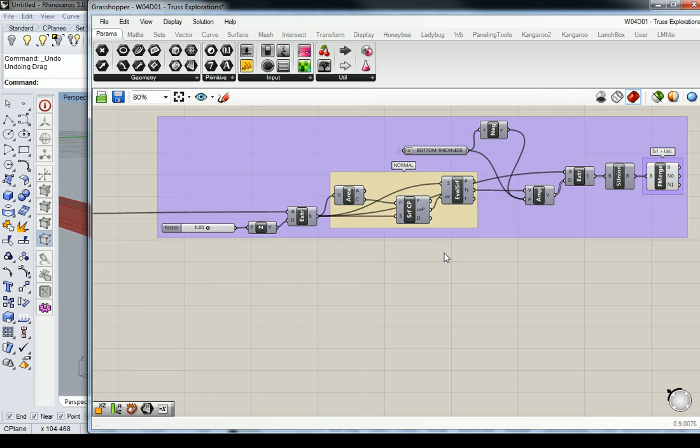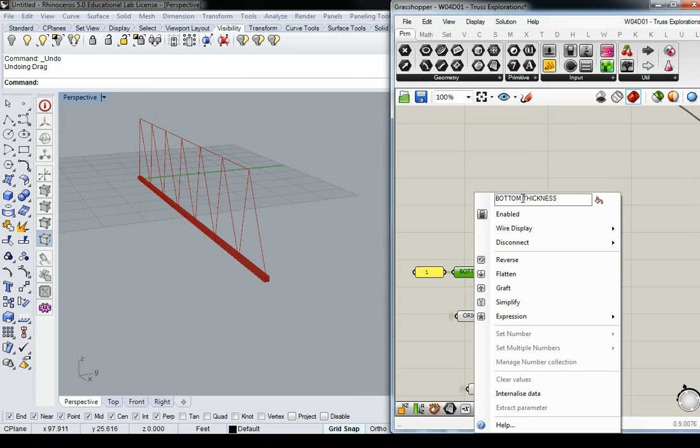Let's continue on with the top chord. So the top chord is pretty much going to be the same story. In fact, I think it's just about going to be exactly the same thing. So I'm going to just copy this, paste it, put it down here. And I actually will copy this in case I want to change the top chord thickness to be different than the bottom. So I'll change this to top.

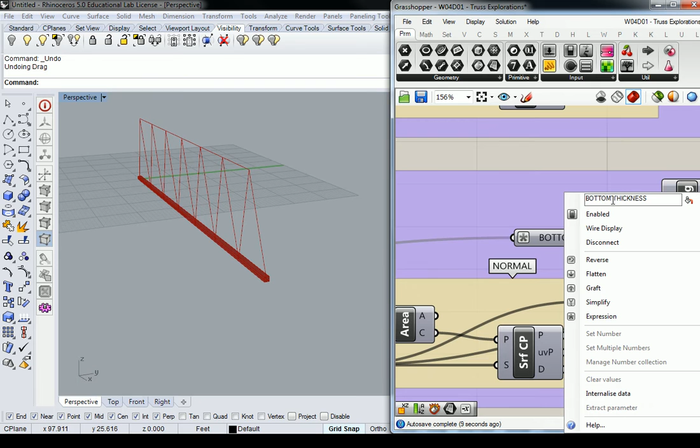And then make sure that you replace the connections. So you won't see this one, that this one is actually connected down here to the bottom chord thickness over here. So you have to override that one manually. So now this one is connected, and make sure that you rename this one as well, just to be clear, so you don't confuse yourself. You have to rename it in both positions. So change this to top.

And then you also have your bottom curve plugged in down here still. So you should be able to just replace your top curve, and that'll recalculate the whole thing on the top. Once again, simple enough, right?

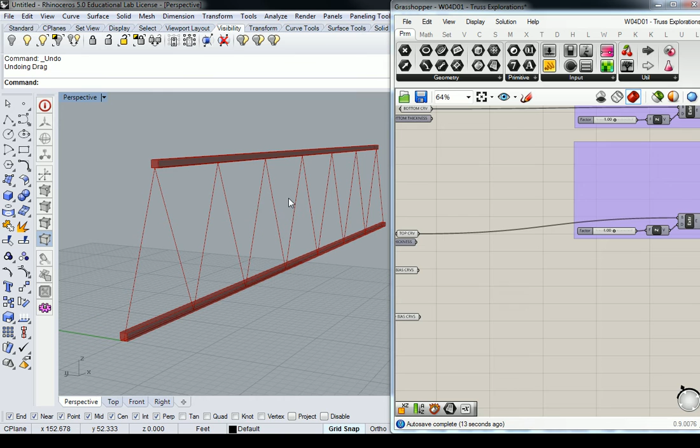Yay! I know, it's super exciting.

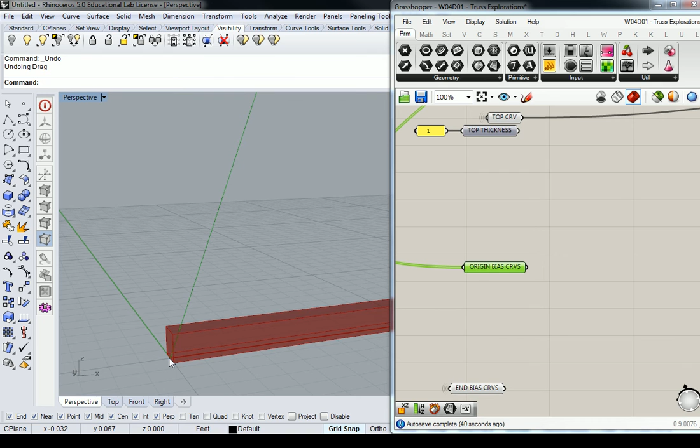So then here, now as you guys are getting caught up with me on that one, I'm going to begin to explain what happens with the other ones. So the other ones are a little bit different. If you notice here, the origin bias curve goes all the way to the end here at the base, and then it goes again all the way up here to the top at the bottom of that top chord.

Sorry. Something to be aware of is that this extrusion actually went in the positive direction, not the negative direction. Okay, so that's why it's converging to a point on the bottom of the top rail or top chord. So if it matters to you, you're going to want to flip that down to the bottom side, if the outer profile of this is like your absolute maximum. Anyway, I just want you to be aware that that happens.

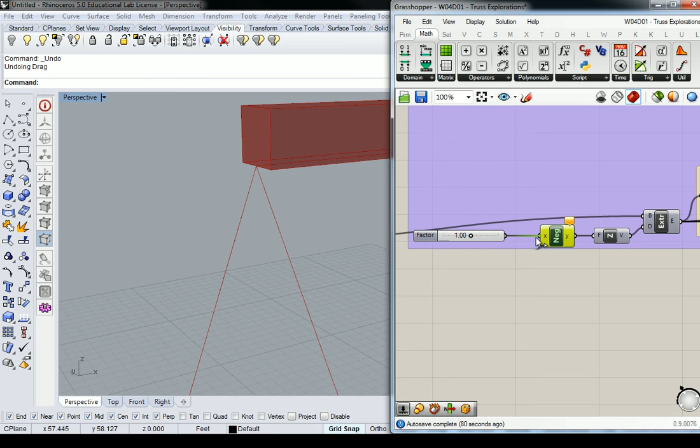So just for argument's sake, I'm going to flip that back to a negative so that it goes down instead. There you go. And so that's going to look like that now. And at this stage, I'm kind of looking at this, and I need to think about how I want the extrusion to look for this particular item.

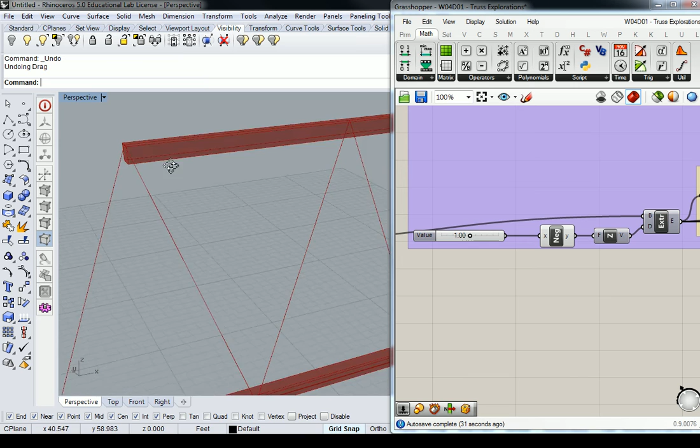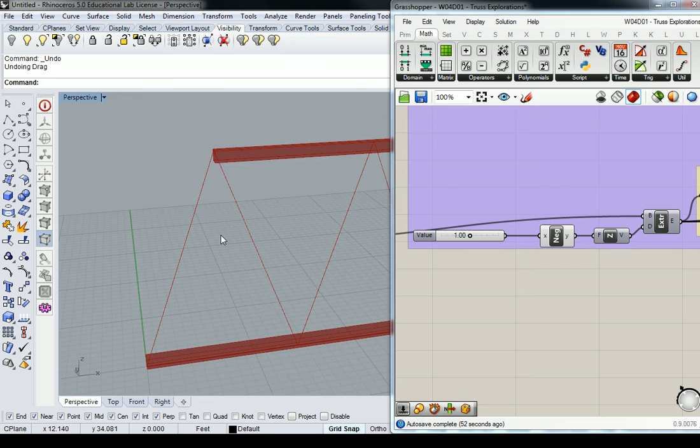You have a few options. It kind of depends on how you want to detail it. I have the ability to extrude the face of this a little bit further out if I need to. I could also go through the process of actually trimming this curve. I could decide whether or not I want the internal curves to extrude both directions, but if I want my end curve to only extrude down, that's a possibility, but there will be some asymmetry associated with that.

So for this case, let me check what scale options I have actually. Scale and non-uniform. It's going to give me the base plane X, Y, Z. Yeah, scale, that's what I wanted. Okay, so in this case, I think what I'm going to do is, in Rhino at least, it's called scale one direction. And it just scales it along one axis. So for those of you who don't know, it basically means it's a stretch tool.

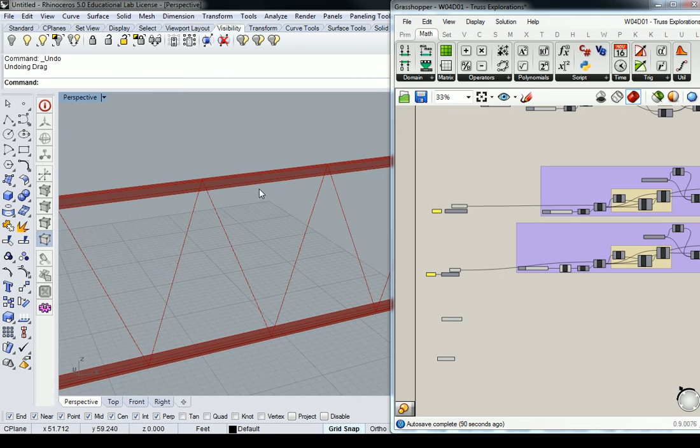So if I have a circle and I scale it in the x-axis, it becomes an ellipse, right? Because I've stretched it out in one direction. So we can do that using the Scale NU tool. So it's under Transform, Affine, Scale NU. And so this is a scale with non-uniform factors.

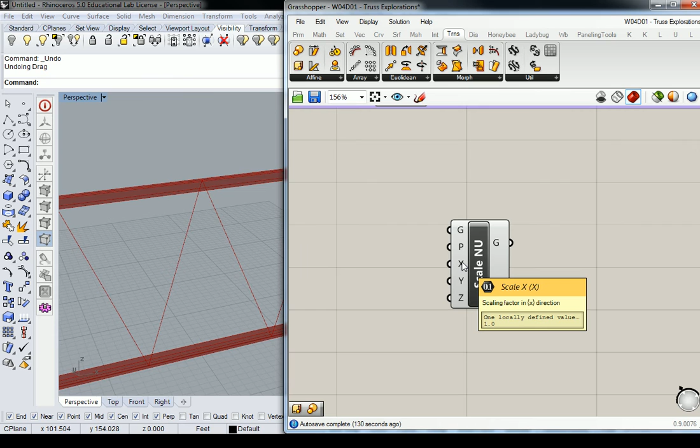So that means if the y and the z remain at a scale factor of 1, and we change the x to be a scale factor of 2, then we've essentially stretched it in the x direction to be twice as wide. Does that make sense, theoretically? So let's apply it. Yeah, this is for the top chord. All right, so this is the item that we're going to extrude. Scale one direction. So we can plug that geometry in here.

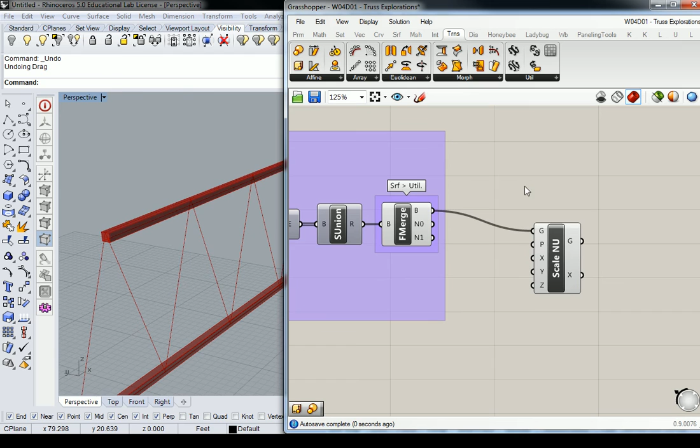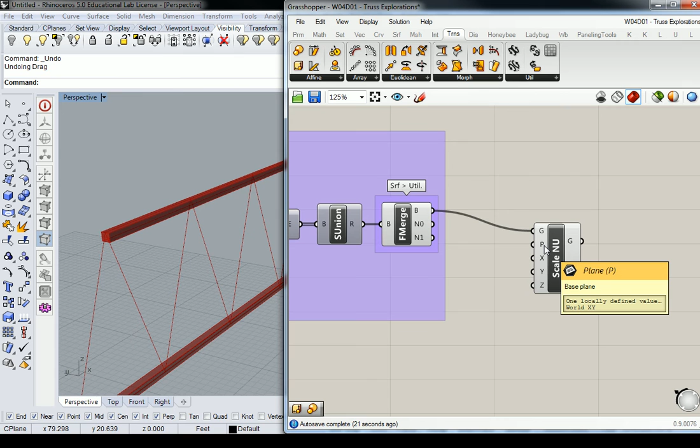The base plane is kind of key. So the base plane is going to be something that we define to be the new x and y and z relating to the orientation of this particular item. So if I don't change the base plane and I use the world XY, that means that it's always going to stretch in this direction.

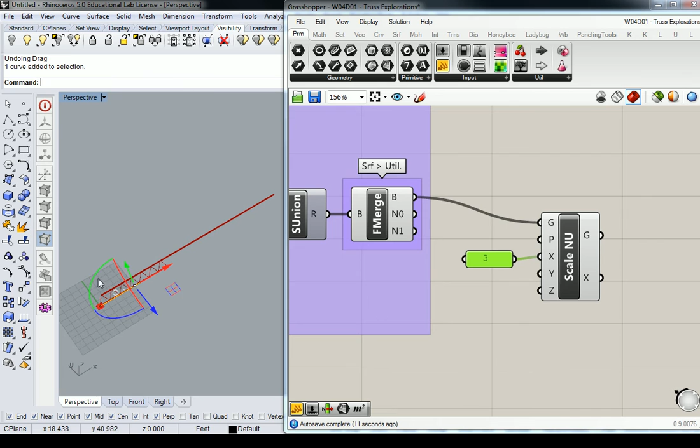So for instance, let me drop a param in here that scales it a value of 3, just for argument's sake so you can see what happens. So if I scale this 3 times in the x direction, it goes that way. And then if I change the orientation, then no longer am I in line, right? So we need to make sure that we reorient the plane to be associated with that particular edge.

Also, the scale factor, you'll notice here when it's a world value of 3, it moves the geometry to this point right here. Or not this point, but I should say this position. So why do you think that is? Cuts it into thirds. What's that? It cuts it into thirds. No. Good thought, but no. It's actually really confusing because it looks like it's exactly on that point. So I can see why you would draw that association.

But the fact of the matter is, in the x direction, the position of the existing geometry is not on the x value of 0. So when it scales by a factor of 3, it takes the distance in the x direction that this thing starts, and it multiplies that by 3. So it starts it in a new position. So that means that the plane that it's scaling by is positional as well. It's not just orientation and direction, it has a position. So the plane is also the center point of scaling.

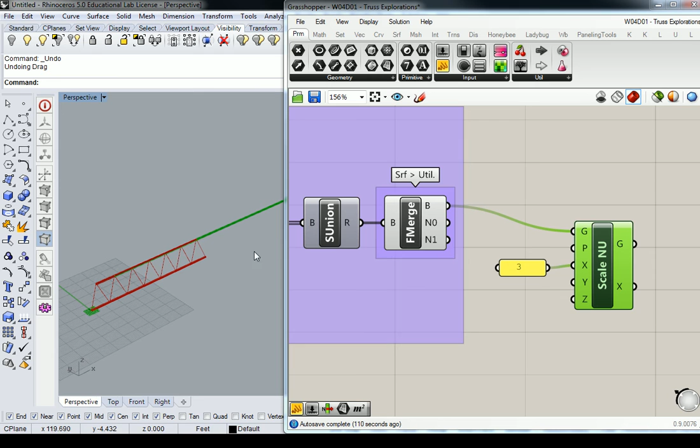Is that clear? So what we're going to do is find the midpoint of that geometry, or whatever point we want to scale it by. Or the midpoint of the line even would probably be best. And then we're going to scale it by that. So let me show you 2 ways of doing this. The midpoint of the geometry, which is the easy one. We just find the centroid.

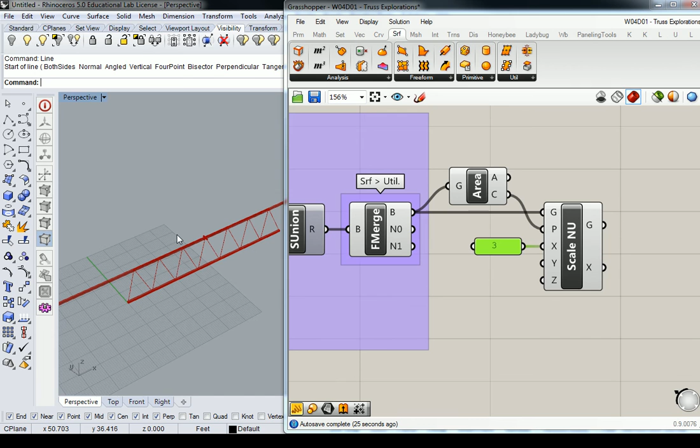So let's go to Surface, Analysis, Area. And I plug this in. And then I plug the centroid into the P value. So now you can see that it's extruding this geometry on both sides. Right, so that corrected it, sort of, kind of. However, if you... Oh, wait. It's only one direction, so it won't do... Okay, never mind. We can just use the centroid in this case. I was going to overcomplicate it. So anyway, in this particular position, we found the centroid. We basically replaced that as the plane.

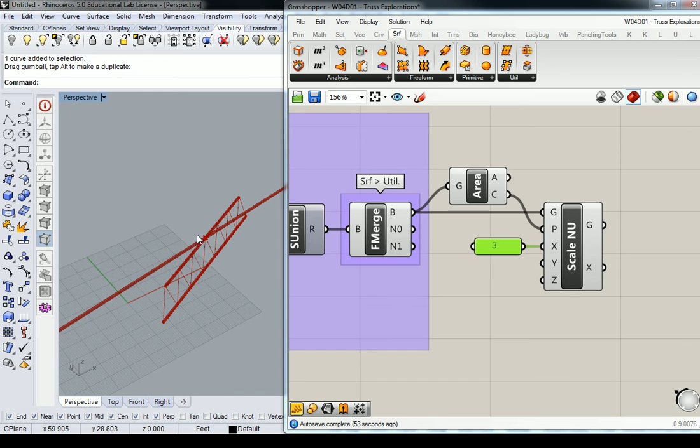However, the centroid is not going to work for us here because, again, if I take this geometry and I move it, it's still an XYZ based point because all we did was give it a point, and the point borrows its orientation from the world XY in this case. So going back again, the actual way that we want to do this is to find our center plane / point by using a perpendicular frame. That's the best way that we can do this. It's found under Curve, Analysis, Perp Frame.

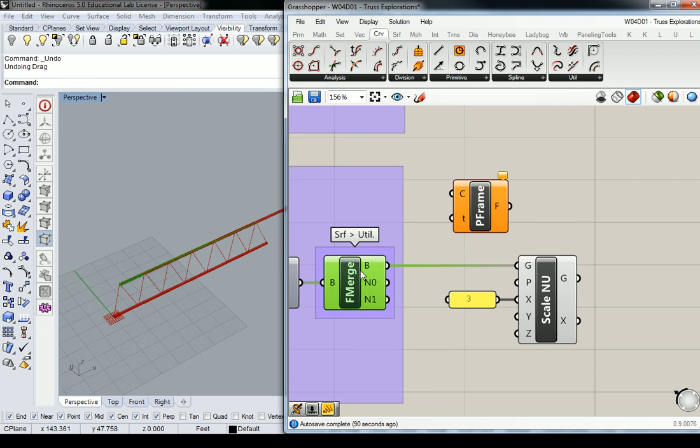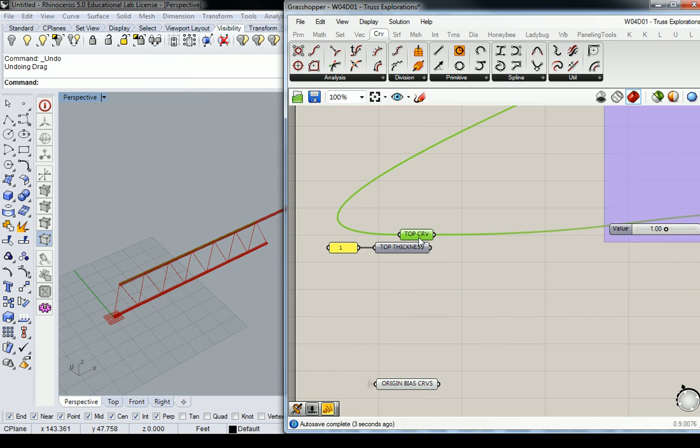So the perp frame is evaluating a curve at a particular parameter. And so this is a domain. It says parameter on curve domain to evaluate. So let's take a look at what that means. I have to go back to the curve itself first. So I'm going to find the, where was it? There it is. Not top thickness. Top curve. And actually, I'm going to clean this up a little bit. So I'm going to do another wireless TOP CRV. And I'll put this back over here. So the top curve gets plugged in.

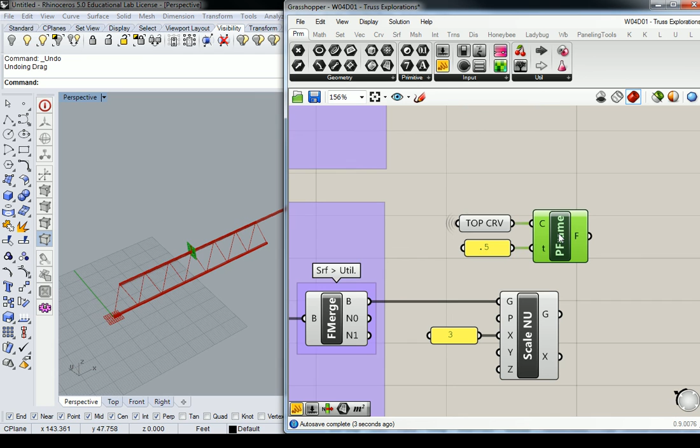The parameter is saying that it's a parameter on a curve domain to evaluate. So when it says domain, I don't yet know whether or not it's a distance or if it's a percentage. So the reparameterize function might come in depending on what we want to do here. So I'm going to do a static number of 0.5 because I want this to be exactly halfway across the length of the curve. So I'll plug that in here. And what you see is that it places a frame halfway across the curve.

And if you get down really low here on it, you can see that it's aligned with the top of that rail. Are there any questions so far? Am I jumping too far ahead?

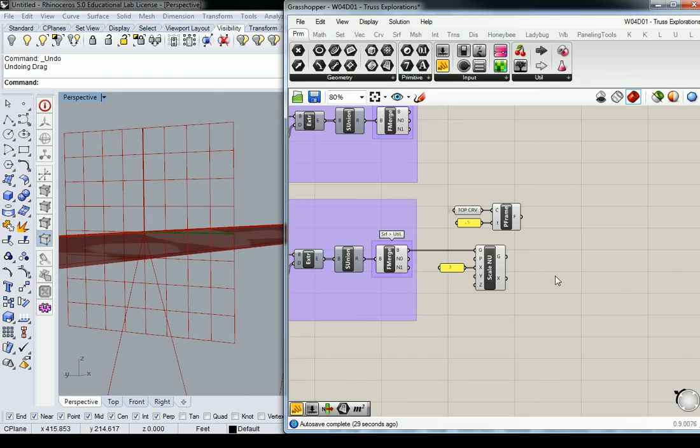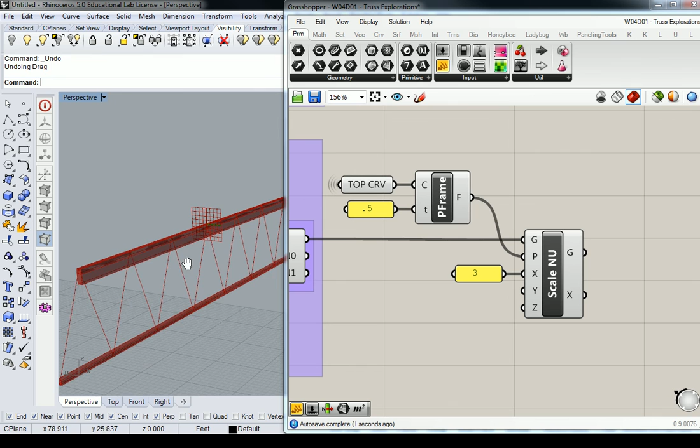Okay, so let's finish up this thought here. So the Scale NU is going to require that we scale it in a particular direction that's relevant to the perpendicular frame. So when I plug the perp frame in as my plane, you'll see that the x direction is actually wrong. It goes down instead of out. And that's because now, if you look at the grid here, the x direction is this red axis. The y direction is the green. And then the z direction is the one that is now aligned with the rail itself. So it made a frame that was perpendicular to that line, which means that line then becomes the normal.

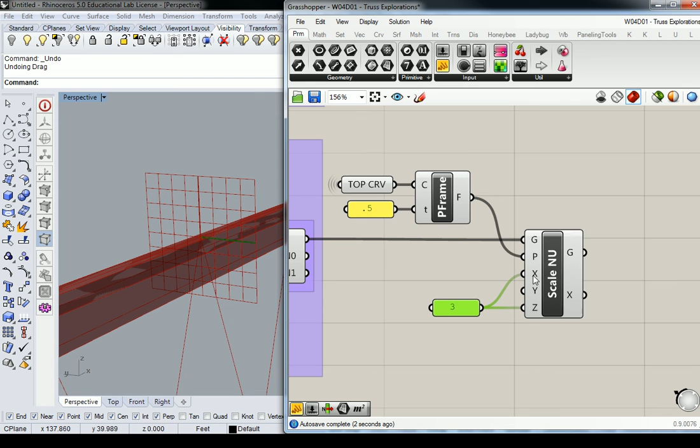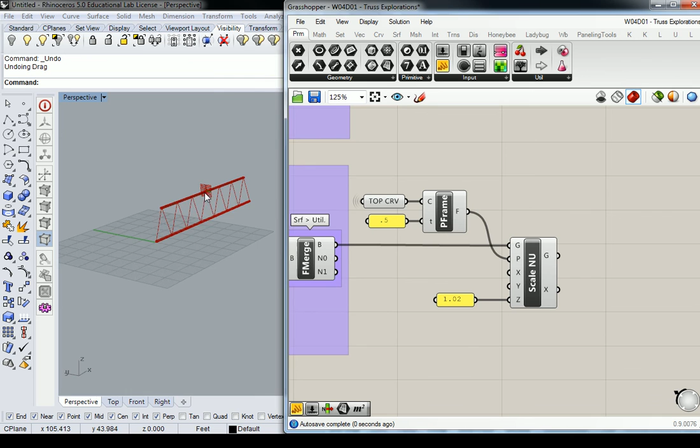Making sense? So this means our scale factor now needs to be on z and not on x. And obviously a scale factor of 3 is way too long. We probably just want to bump it up a little bit so that it encompasses the thickness of those arms. So I'm going to try something very small, like a 1.02. Okay, something like that should probably be appropriate for now. And I'll adjust it ever so slightly when I actually get the thickness of the arm on there if it doesn't look right. So what questions do you have?